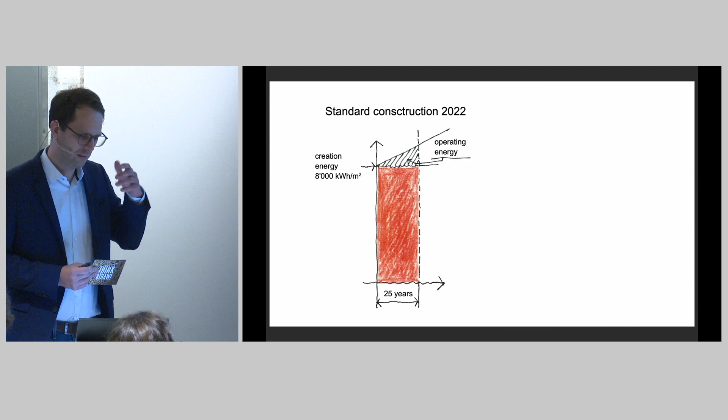So first of all, why did we actually start building with straw? This is a simple statistic that tries to show what the building standard is like nowadays, and what the important points of it are. First of all, we have the creation energy for the building itself, which depends on what materials you use.

For example, if you use concrete and EPS, this is going to be really high. If you use timber and straw, this is going to be really low. That's one factor. The other factor is the operating energy of the building: the more insulation you have, the less energy the building needs, and the more photovoltaic you use, the more energy the building itself can produce.

And the third aspect, which is probably the most important one, is the lifespan of a building. The most ecological buildings are always the buildings that are never torn down, because the moment you tear down a building, you destroy all the energy that was put not only into its construction, but also the energy the building needed itself over all that time.

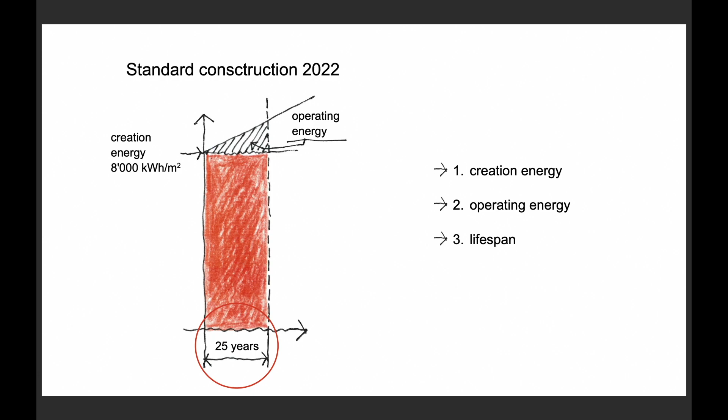So our goal, our vision, is to reduce the creation energy as much as possible by using alternative materials that don't use a lot of gray energy. We try to build buildings that produce more energy than they use.

In this statistic you can see that after 25 years, this is always our goal: the creation energy the building needed is built down, and after 25 years this building is net zero CO2. So after these 25 years, the CO2 level just goes down and not up anymore. The most important part for us is also the 25 years.

We want to build houses and constructions that are not torn down after 50 or 100 or 200 years. We try to build buildings that last a long time, and this is only possible with an architecture that is culturally based, culturally rooted, and that gives a lot of possibilities to reuse the building itself.

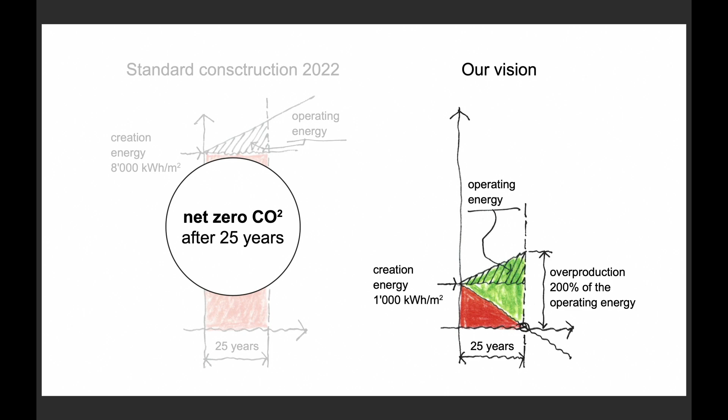Only if the buildings seem usable for the inhabitants will they not be torn down. Otherwise, they will be torn down. This is the most important part, because it's the architectural element within the sustainable idea. It's not just about using ecological materials—if the architecture is bad, the building is going to be torn down after 20 years or whatever.

So why did we start building with straw? We compared all the materials we could use from the point of view of gray energy, and this is just a comparison.

For example, for 1 cubic meter of EPS isolation - do you say EPS in English? Yes, okay - you need around 900 kilowatt hours to produce this 1 cubic meter of isolation.

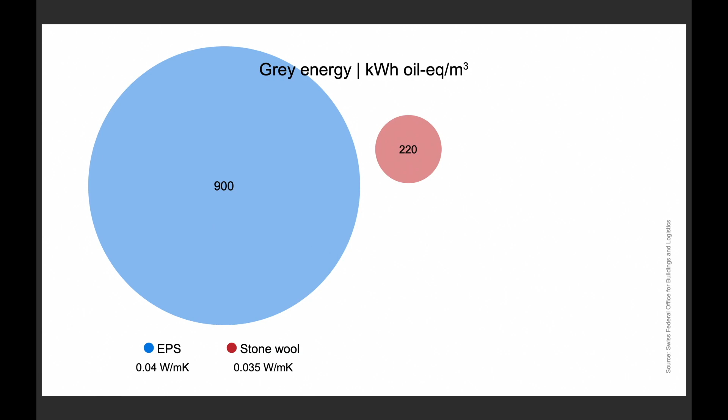For stone wool, you need around 220. For glass wool, you need around 90, and for cellulose fiber, around 63, and for straw in general, about 20 kilowatt hours per cubic meter.

And it's not only the gray energy that it takes, but it's also the CO2 that is inside the straw, that is kept into the straw, that is also an important factor compared to the other materials.

And you also see the heat transition coefficient from all these different types of isolation is similar, but straw is really close to the other industrially produced materials.

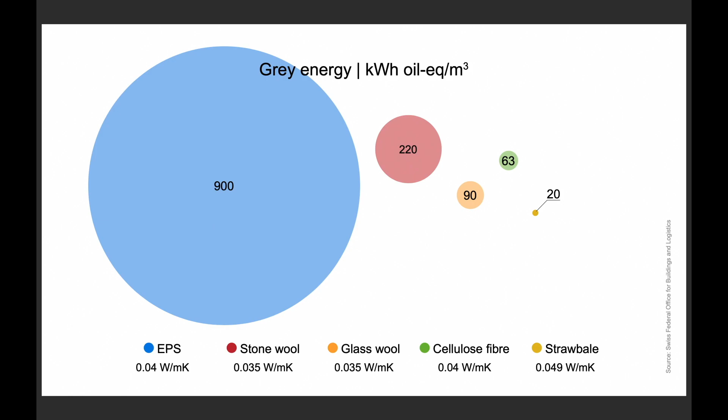And this material, like Mr. Gunnarsson said before, it's just on the field. You can take it from the field. It's nothing that is processed more than the thing that comes from the field.

And we heard before about quality management. For example, straw isn't a product that you're going to receive from a company that is specifically working with construction.

The construction company or the contractor is going to say that he doesn't have straw, or he doesn't know where to get it. We also had a lot of these discussions in Switzerland.

But the straw itself, every farmer knows where to get his straw, and the contractor just doesn't know that there is a whole agricultural logistics for this product that they don't know of.

And this agricultural logistics is really, really good, because any farmer can call today to the contractor, and he's going to get his straw tomorrow. But the problem is these are two different logistics.

One is the agricultural logistics, and the other one is the construction logistics. And also with the quality management, a farmer knows how a good straw bale should look like, and no one is going to give the farmer a guarantee.

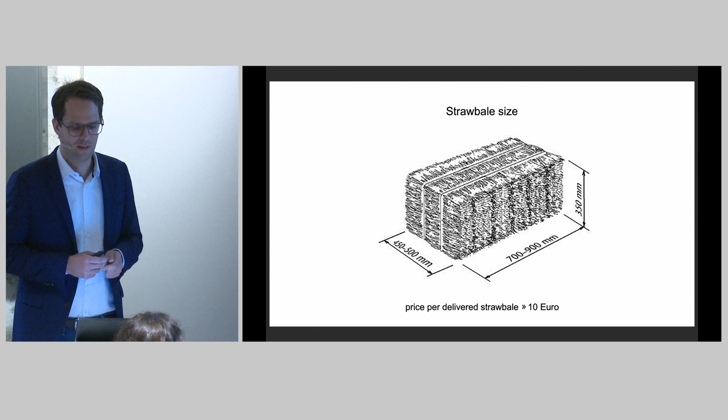But it's a bit problematic also. Like I said, in Switzerland, we often have to explain to contractors that this is not a bad deal for them too, because it's not a lot of work to do it, but they need a bit of persuasion to do it.

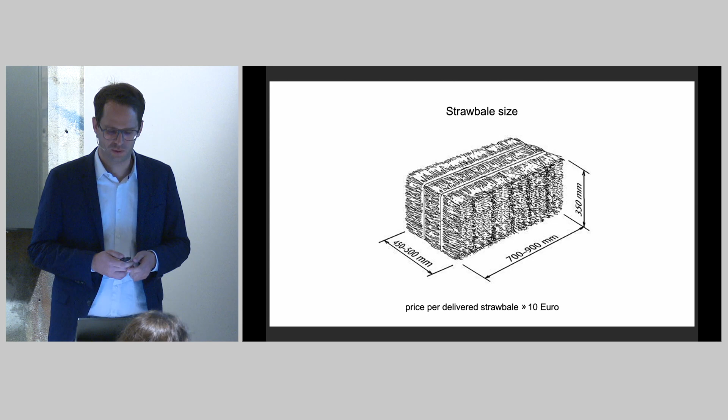There are mainly three different types of constructions when you're building with straw. One is the frame construction, where you use the straw to fill the frame.

And there is the second type, where you build up the straw bales kind of like bricks in front of, for example, a timber construction, or also another kind of construction.

And we mostly use the second type for renovations, for old houses. And then there is the third type, which is the load-bearing construction, where the straw bale itself is the brick.

So you don't need any structural parts beside the straw itself. And this is kind of the most advanced way to build with straw, because you reduce the gray energy from the whole wood construction too.

And this is not a new invention. The first load-bearing houses were built at the end of the 19th century in the United States, because the farmers there realized that if they take the straw bales and build houses of it, it keeps you warm in winter and cold in summer.

And also in Europe, the oldest frame construction with straw bales is in Montargis, France, and it's now around 100 years old, and you can still go and take a look at it. So it's not a new invention, it was always there.

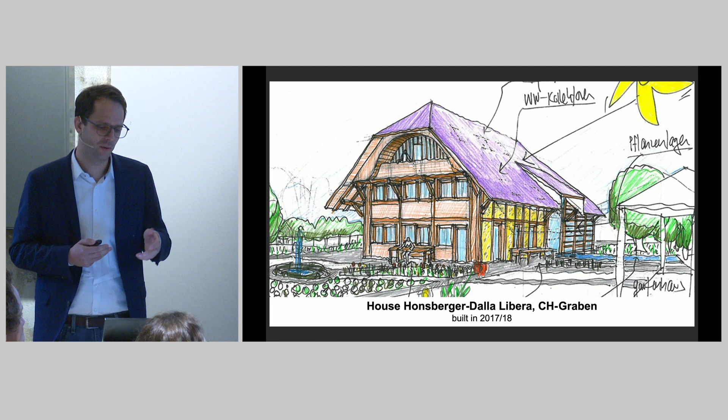I'm going to show you different projects where we tried to realize our vision, and this is the first one. It's a single house, but I show you this because we could realize so many parts of our idea there. This is in the Swiss canton of Bern, a single house in a small village, where the State Office of the Preservation of Monuments told us that this building has to look like the other buildings all around, and these houses in Bern typically have really big roofs. But the client wanted a really open space, a really modern architecture. So that was at the beginning kind of a problem to get these two ideas together.

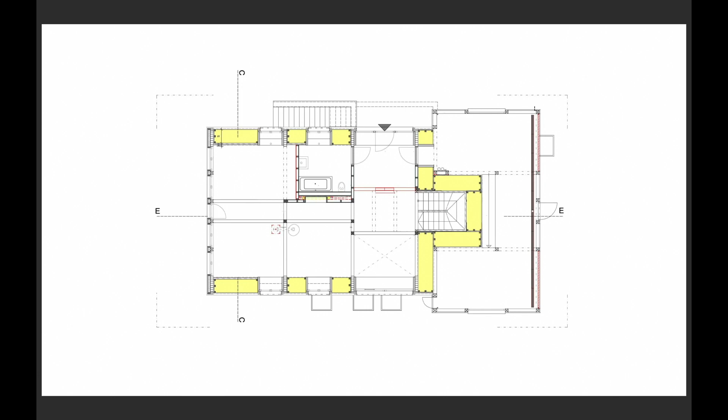But we started by doing a simple ground plan. On one side the garage, and on the left side we had a wooden frame construction that was stiff in itself. So we started with this wooden construction, and then we created elements filled with straw into this wooden construction.

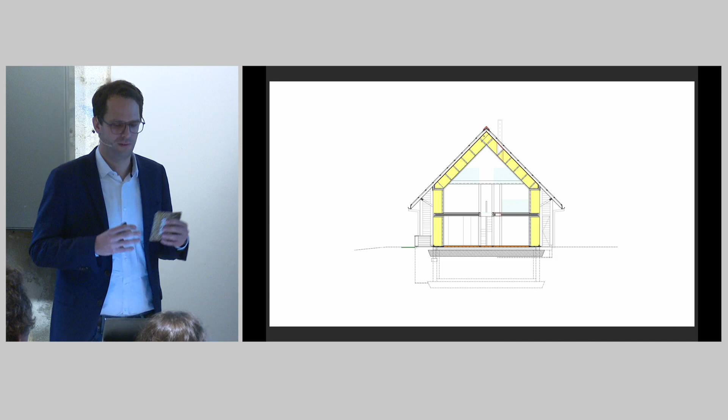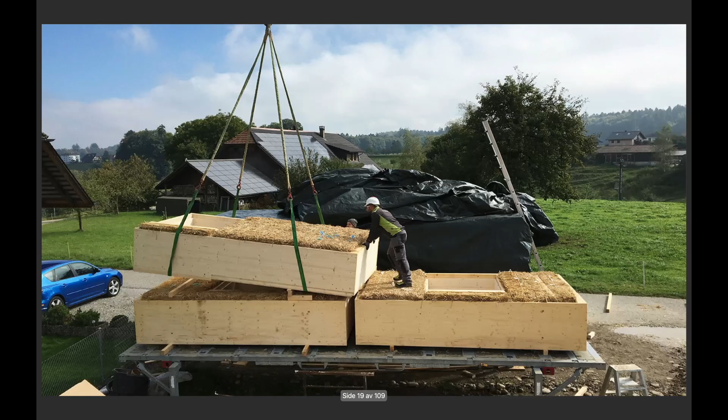Here we worked with bigger straw bales, so the wall is 80 centimeters thick. But this way you don't need a lot of rest energy, because all the energy that you produce in the house itself is enough to keep the house warm. Here you see this timber frame that we started with the construction, and into this timber frame we put these elements of straw. You see the thickness of them.

Just to explain how it works in Switzerland: we as an architecture office write down all the work that is necessary to do, and then we send it to different companies to give us a price. For example, they often don't know the price for straw, and then they are unsure about this, but we always get different prices. The prices are really different often, but at the end we always find a contractor that does it for a reasonable price.

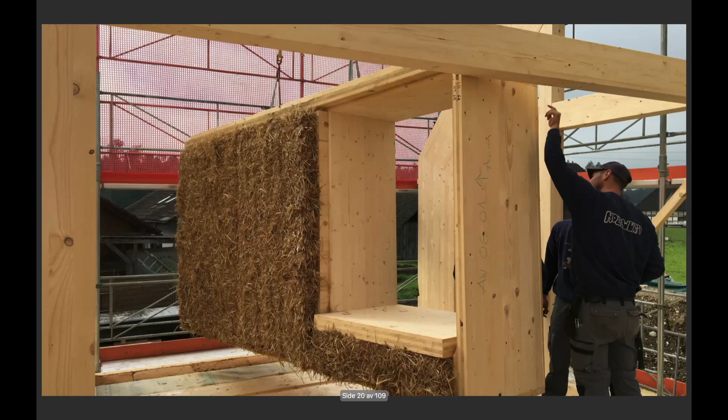So this is one of these straw elements. In this case, because the wooden construction itself was stiff, we could leave the straw open, from the inside and the outside. On the inside we worked with clay, and you can use the straw itself as a plaster base - we put the clay on it. On the outside we worked with lime, because lime is really typical, especially in the Alpine region. Lime is water resistant in comparison to clay, which is not water resistant. So we often work with clay inside, lime outside, and in the middle the straw for the insulation.

So you get all the perfect aspects of clay, which is a really good product. We have the straw, which has really good aspects of insulation, but also the possibility to use it as a brick itself. And on the outside you have the lime, which is water resistant but also open, so the whole wall can breathe. This is also good for the living inside - it's really healthy living because you don't live in a neoprene, but the building can breathe.

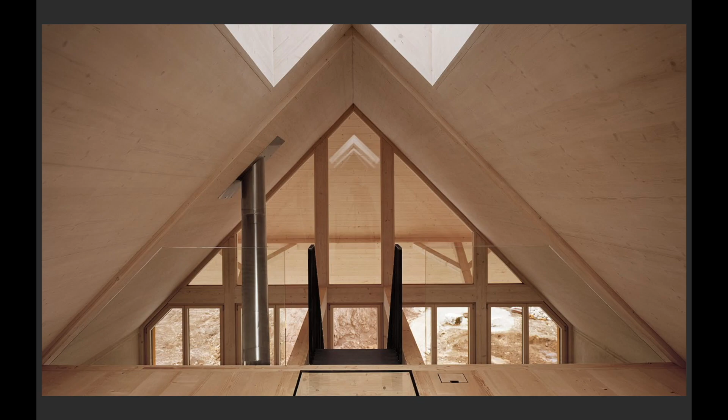Then you can see this huge roof that we had to build. We took this as a chance, and we covered the whole roof with photovoltaic and solar thermal. But the problem was that with this huge roof, the clients still wanted a really open space and a light-filled house. So we created light shafts on top that go through the whole building. You see at the top one of these light shafts, and for the ceiling we worked with a lot of glass so that the light comes through the whole building.

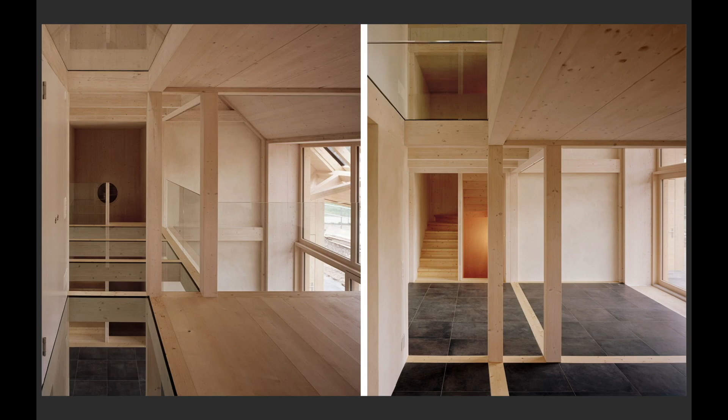And so the building is really light and modern, even though it has this huge roof. The building itself produces around 6 times more energy than it uses. So the CO2 emission from the construction is offset after 25 to 30 years.

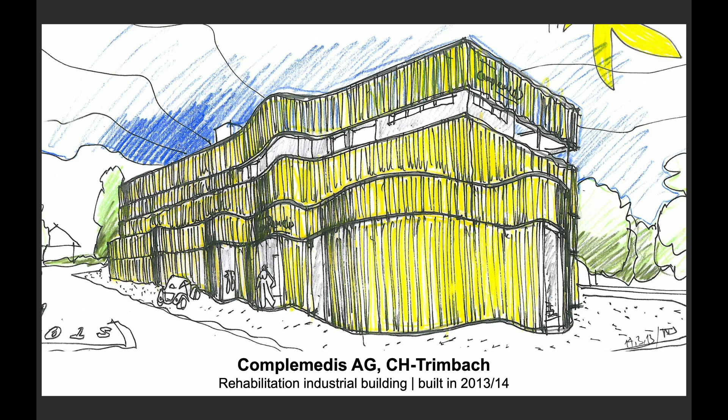So we decided to work with the sleeping bag idea from before again. This time we have a winter coat and a summer coat. The winter coat is made with a straw construction - wooden elements filled with straw. The summer coat is the bamboo cladding you saw, which prevents overheating during summertime, and it's also a product that's really close to the company itself.

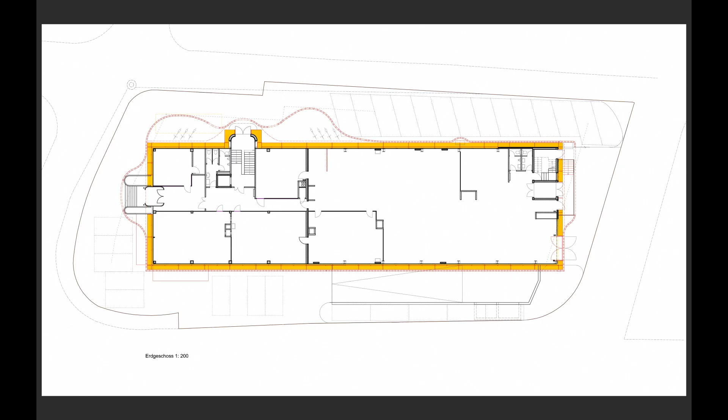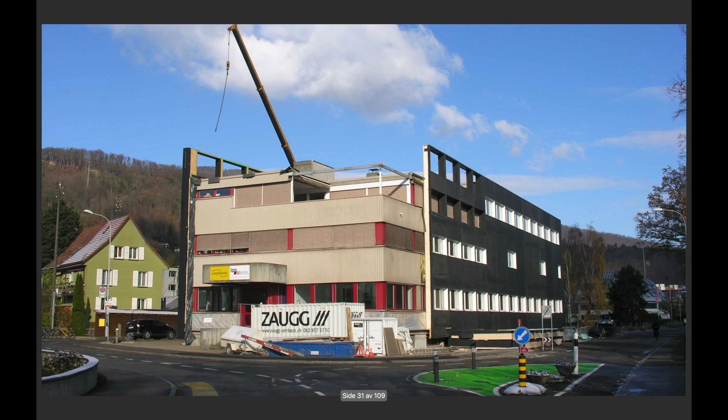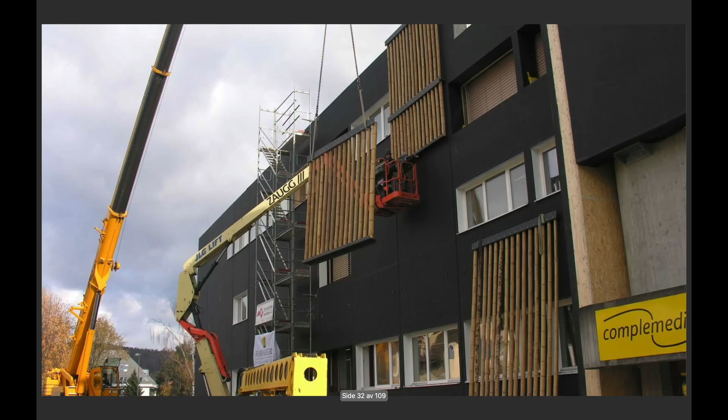Here, this is a picture during construction time. You see the winter part, the insulation for the winter time. And here you see the summer coat being put onto the building.

And this way we could accomplish all the goals the company told us. They could use the building during the whole construction time - this wouldn't have been possible with other construction methods. So for them it wasn't even a question of whether this was more expensive, because we could ensure they could keep working during construction. This was their main argument, not the ecological materials.

And at the beginning, the bamboo looked yellow. Nowadays it's silverish, and it actually looks even nicer than in this picture.

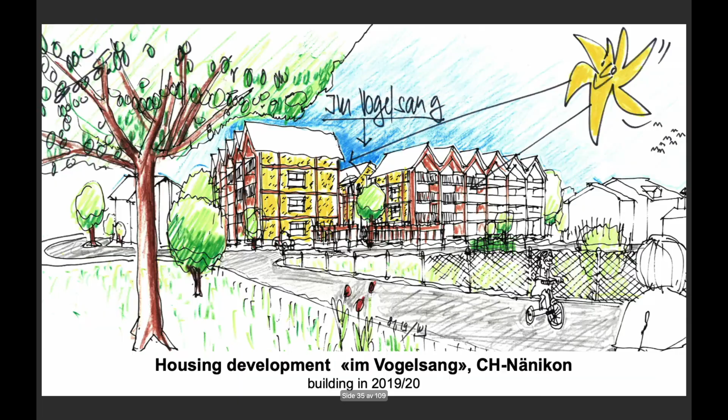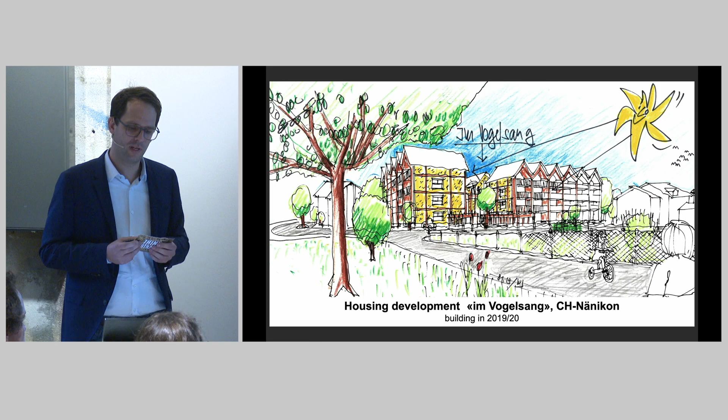Okay, then this is the next project. This was an investor's project in Nänikon, close to Zurich. The client came to us and said they want to build ecological, but they also want a return on capital - and the return on capital should be like the market return on capital. So we had to find ways to build ecological on one side, while also guaranteeing the return on capital on the other.

So we made different decisions for that. One of the main points was: if you build ecological, the architecture has to be persuasive enough that people are willing to pay more for it, because people are often not willing to pay more just because there's clay instead of something else. So we had to create a good building with more qualities than a normal building.

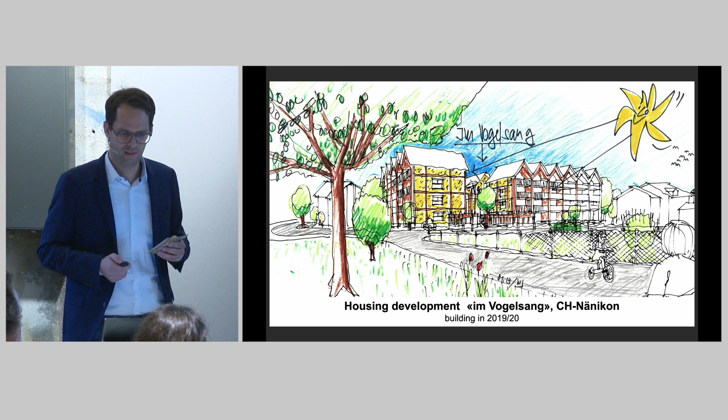And here we tried to do that. This is the situation of the building, and we put these 3 buildings on the outside of the building plot, creating an inner courtyard with a lot of different public spaces.

You start from a really public space, and then every inhabitant goes through a balcony access to his flat, and it gets more and more private until you're at your own front door, and then you have your own entrance to the house.

There were two ideas behind this. On one side, to create a village-in-a-village kind of way, so every inhabitant has their own house, their own door, so they feel this is really their home. It's also interesting - people nowadays really look after their balcony, they take care of it. On the other side, we wanted to reduce the expensive part, which is always the heated square meters inside the building.

So we tried to reduce the built, heated square meters.

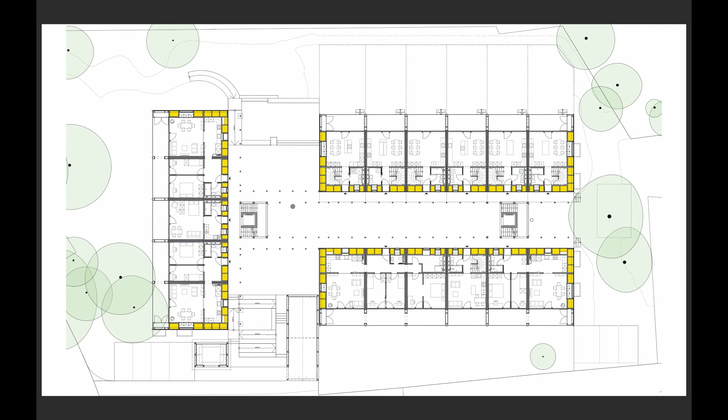This was the reason also for the balcony access, because this way we could do cheap access square meters to get to the apartment. And we tried to reduce and create as few square meters of warm living space as possible to reduce the whole costs.

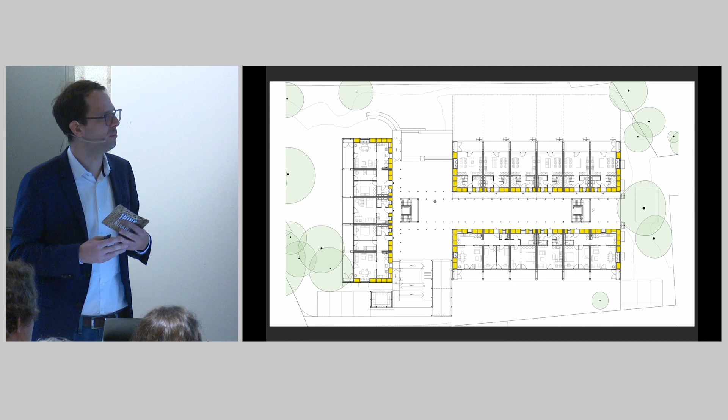On the other hand, we decided with this structure to be very flexible. The marketing company said how many apartments they wanted, what size they should have, and they always changed their minds. So we had to develop a ground floor plan that is flexible, one you could change even at the last moment.

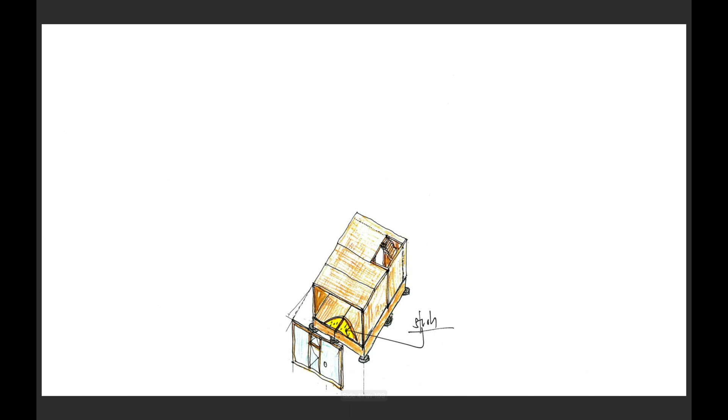So also to reduce the cost, again, we decided to prefabricate as much as possible. We not only created wall elements, but whole room elements that were prefabricated. This way you had a simple way to build the house. It's kind of like Lego, and it helped us that we could work during winter time. On one hand, and on the other hand, because the production was serial, the prices went down.

And at the top, we could use the roof to put photovoltaic panels on them.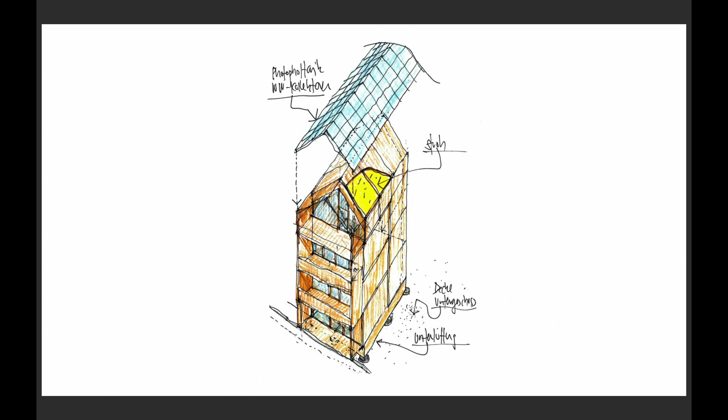On these pictures, the houses were sold, and they were sold really fast. After 3 weeks they were all sold, and this was really good for us because we had the idea, but we weren't sure how the market was going to see this, and people were really looking for something like this.

People were also willing, like if you go to the supermarket and buy a biological apple, you are willing to pay a bit more for the biological apple. It's kind of the same idea, just with living.

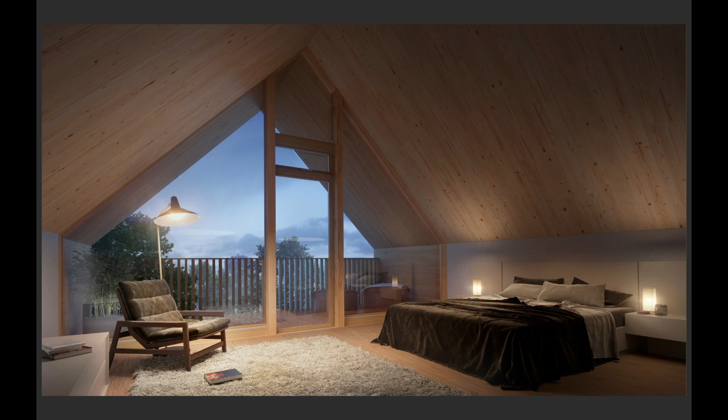We really had to persuade the marketing company that this is possible, because the marketing company always said this is not going to work because people are not willing to pay more for this.

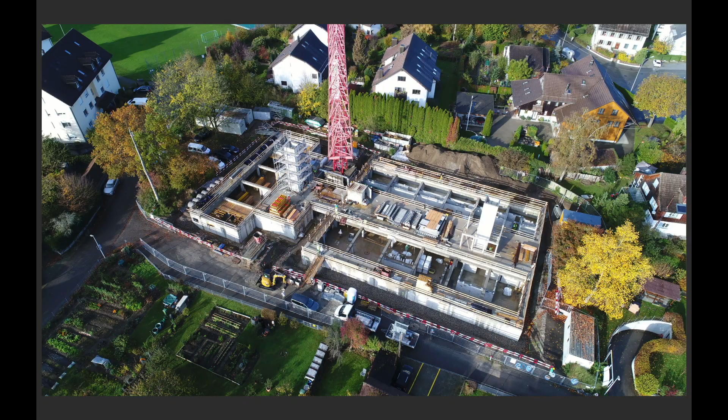So this was then during the construction time. We started, or the contractor started with the concrete works, and at the same moment we were working on the concrete works, the carpentry started working on the elements.

It's also possible to just do the 35 centimeters. If you just take the 35, you also reduce the creation energy, but the consumption cost not so much. But from an investor's point of view, probably 35 centimeters is more economical than working with 70 centimeters.

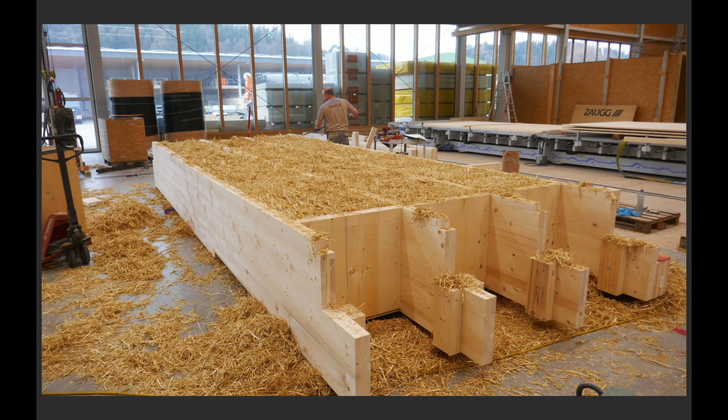This is one of the ground elements. For example, the contractor—we wrote to around 25 of the big carpentries in Switzerland. We sent the offer that they should bid on, and from these 25 companies, just 5 gave us an offer. Of these 5, two were really close to each other, the other 3 were really far away.

So we started working with this company. They got their straw from France, not from Switzerland, because Switzerland's agriculture is really focused on cows and not so much on producing grain. So it's cheap—Swiss farmers get their straw from Germany and from France.

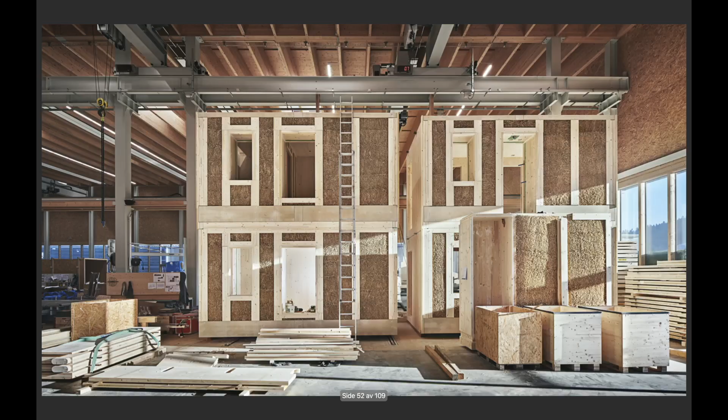And then here you see these whole room elements that we constructed. The idea was that this serial production helped us that the price went down.

Then we took these room elements to another factory that we could rent out just for this space. In this factory we put up all these rooms, and then we sent the other contractors there to do their work. During the same time, the concrete work was still going on.

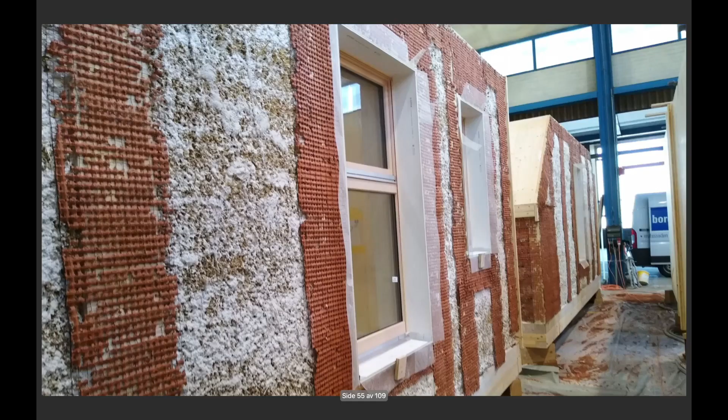And here you see the plastering. You can use the straw bale as a base itself, so we did this.

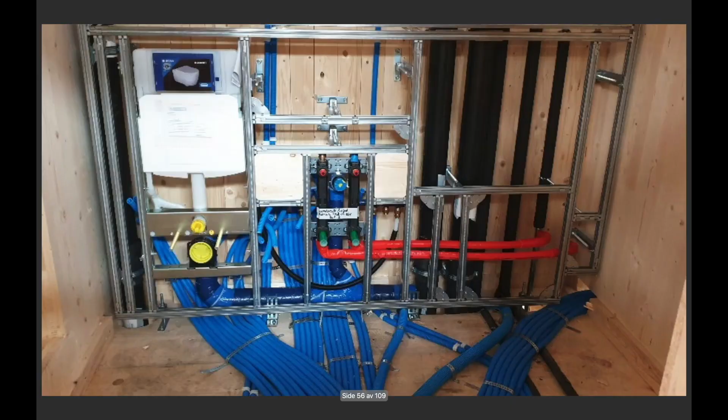And we also put inside all the electrician installations and all the plumbing, the heating, etc. It was all done in this factory.

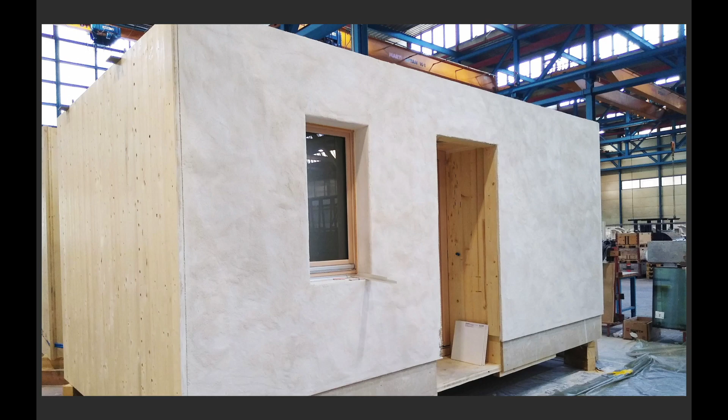We also put the underlay in these rooms so that it's dry when it comes to the construction site. That's the way one of these rooms looked. The windows were already in, the doors were in, and inside a lot of the stairs were done, etc.

Then we came to the construction site, and it was really like Lego, putting this whole thing together. The main goal was to reduce the construction time, and this way we could reduce it for over half a year. This was also an argument for the investor, that they get the return on capital earlier than with another alternative way to do it.

On one side, we got the public space, which we tried to close, with as few windows as possible. On the other side, we open it up completely with light, because this is more private space, and people couldn't look inside.

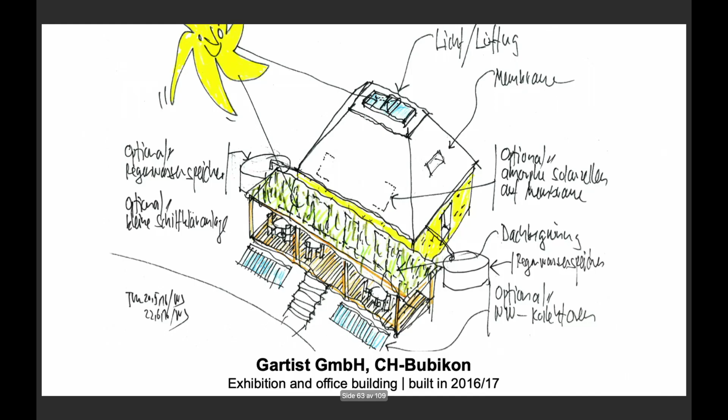And then the last project I'm going to show you. I think I'm a bit late, but this is kind of a next step project. We tried to see how far we can go with straw.

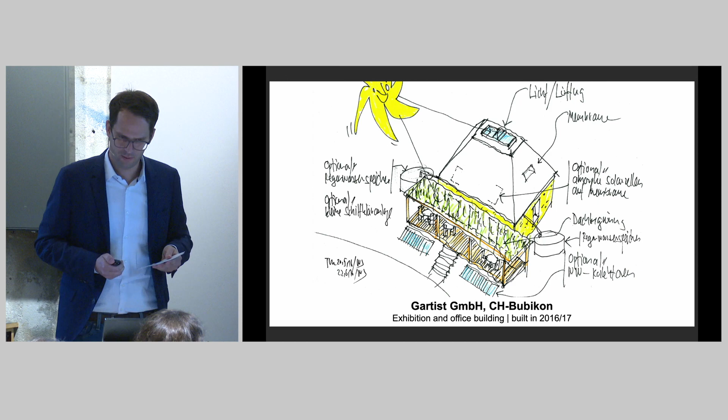We took this idea and thought it should be possible with straw bale too, because straw is kind of a brick, similar to stone. We persuaded this company, which is a gardening company, to have their new headquarters built this way, and this is a load-bearing construction. Not the other part, which was kind of a frame construction filled with straw.

This is now load-bearing, so it's important if you work load-bearing that the floor plan is symmetrical. This is really important, otherwise you have the weights coming down differently, and then you get other problems.

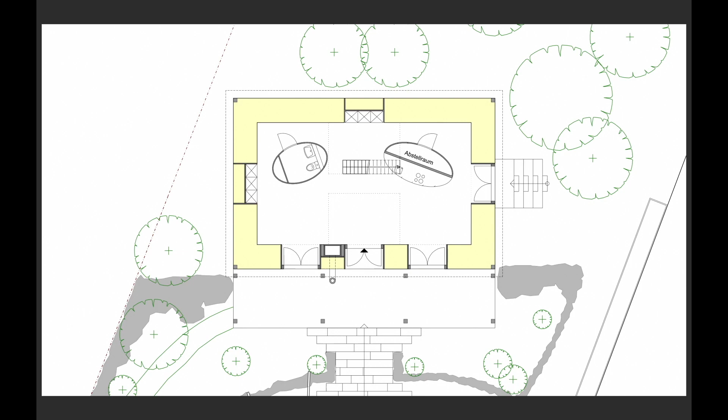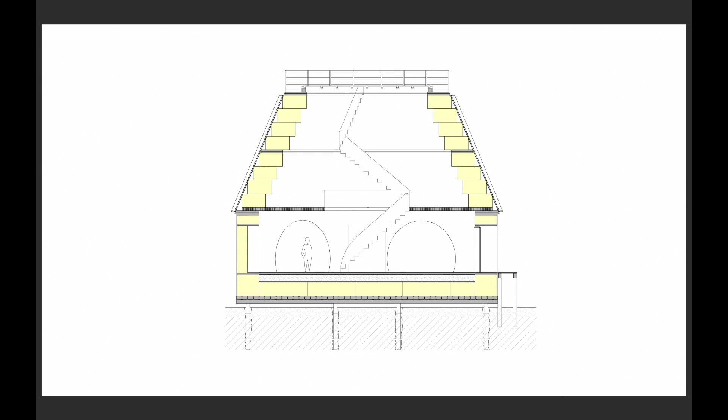We started by putting columns into the earth. The idea was also not to damage the ground.

Then we start with these window frames. These window frames are done. If you put a window on, you have to fix it somewhere, and this is the reason we did these timber frames. And around these timber frames, we used the straw bales like bricks.

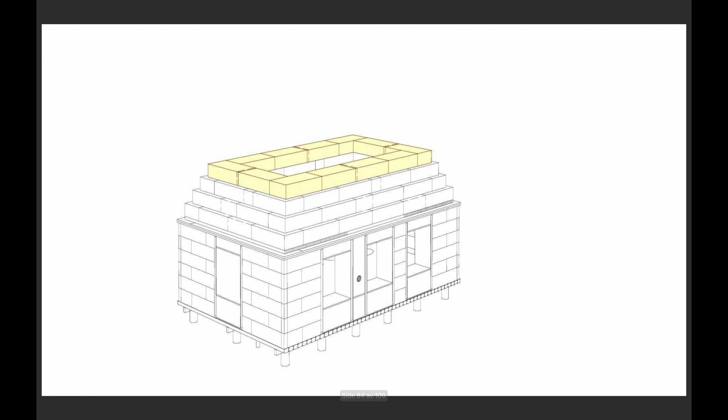And then it went on to the first floor, and then every straw bale was around 20 to 25 centimeters more inside. And at the top we put a huge window so that the light comes from the top.

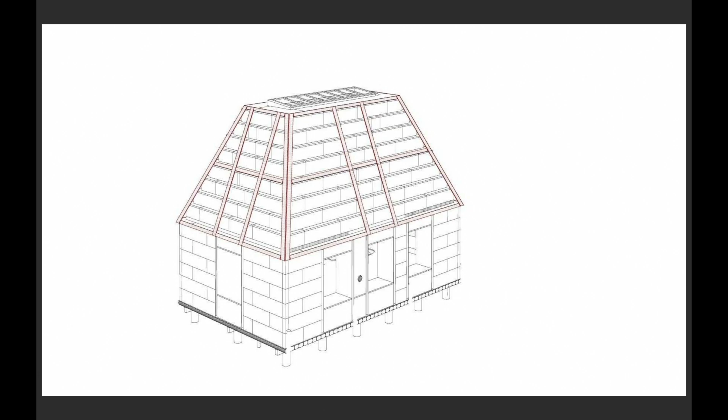On the outside we did clay plastering beneath the roof, just to be sure for the Brandschutz, the fire safety, and we put some corrugated sheet iron on top of it.

So at the beginning you got some air between the two constructions, and then as soon as you put the weight of the roof on top of it, the straw bales are pressed even more until the floor comes down, and you can fix it. Then it doesn't move anymore, the straw is really compressed, and you can't get it out of place anymore.

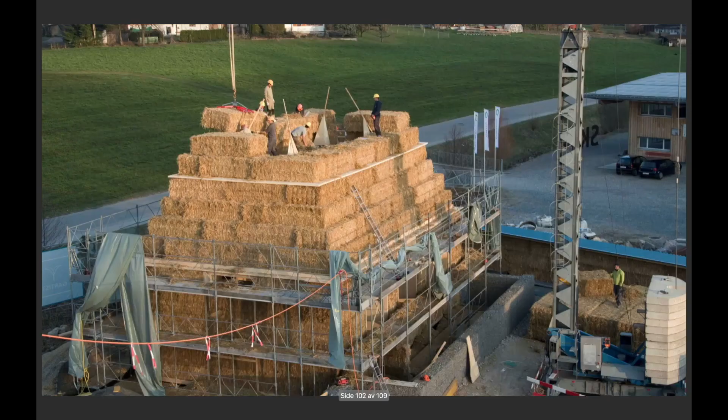Here we worked also with the big straw bales, not the small ones you saw before. The problem with the big straw bales is they're so heavy you always need a crane to move them. The small ones are around 20 kilograms, the big ones around 200 kilograms. So for working with elements, it's much easier to use the small straw bales, but if you work load bearing, it's easier to work with the big ones.

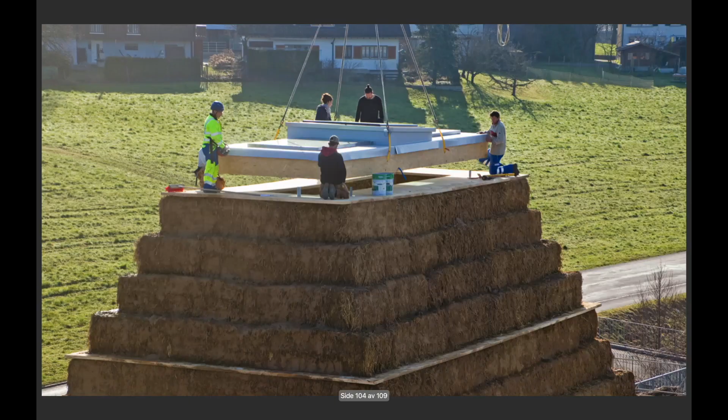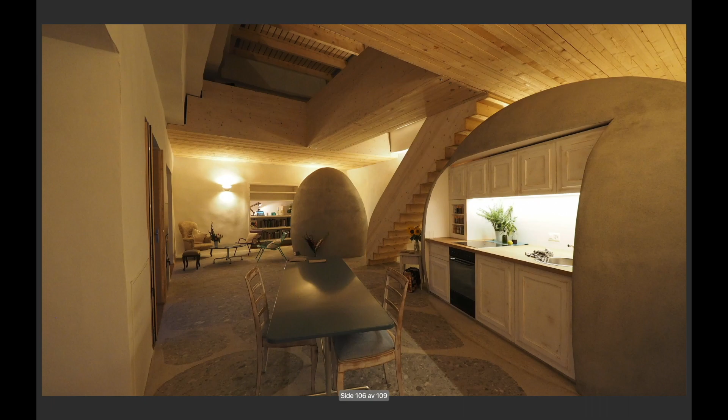This is the inside. We really wanted to show the construction from the inside, so we put lime plastering inside. And now they also rent out this place for weddings or similar events.

And top there are the offices. So we created a stair that you can lift up, so they can rent out this place without people going up to their offices. And there is the toilet and shower inside these egg-shaped structures. This is how it looks now.

I just want to really say to you, this is really no rocket science. It's an easy way to build, nothing complex. I really don't understand contractors who don't want to do this, because the material is cheap, it's an easy way to work, and it's not complicated. And like Sigurd said before, it's there, under our noses, and we don't use it.

The idea is that straw is available everywhere, so wherever we build, we try to get the straw from the place where we do the building. This is really the easiest way to reduce the gray energy part of buildings.

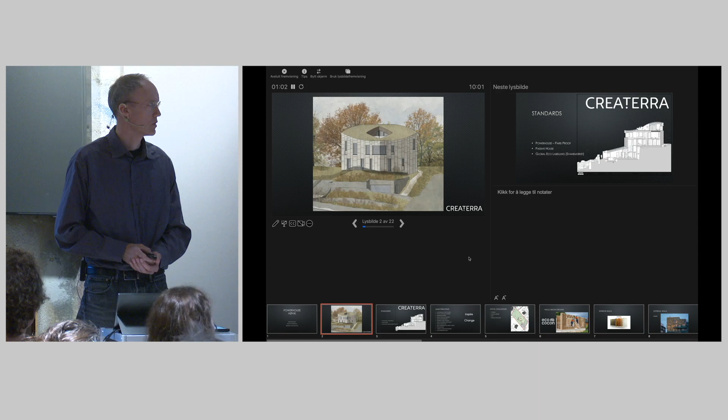We started this process about 5 years ago when we wanted to build a house, and we were rather surprised how little has been done in Norway when it comes to construction and sustainability. So we talked with the Association of Architects, and they helped us through to Asplan Viak, to Skanska, and Snøhetta, which has helped us a lot in this.

We had a house complete, drawn up and applied for last year, which was unfortunately rejected, so we had to move back to start.

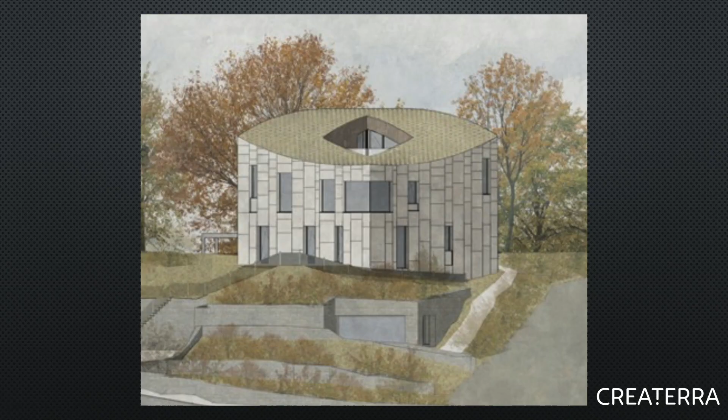The advantage is we learned a lot from this, because the first building we wanted to make was more like a symbol building, a tall one, whereas now, from all the learnings and going back to start again, we wanted to look more at the cubic principle, because that is, in terms of insulation and surface, the most sensible way to do it. We also wanted to have it at high standards.

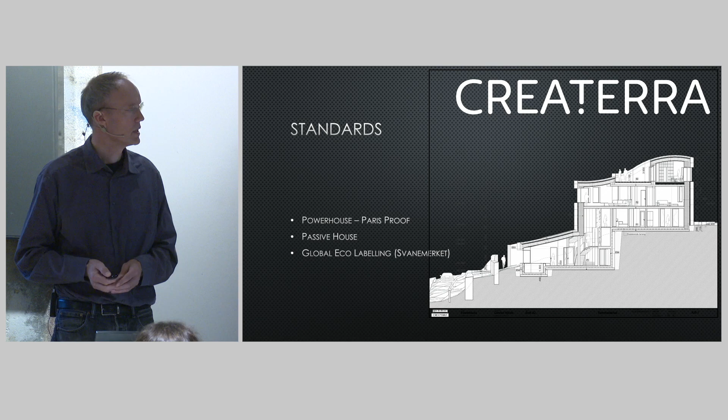It's great with clay and hay, but we wanted to showcase that this is possible for a more upmarket building, and not just a very restrained building. So we've been trying to have 3 standards in mind when constructing this: power house standard, passive house, and eco-labeling. This is the building now in profile from the sides, so you see the top.

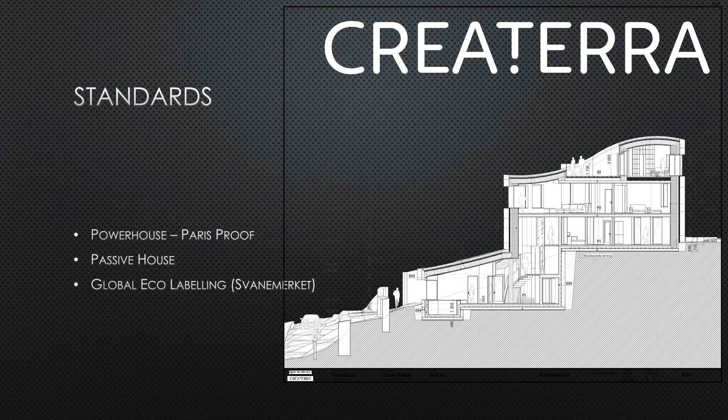This is a sloping property. It's about 11 meters from the road, which is here, up to the surface where the house is. So that poses some challenges. The way we solve this is to put the basement and garage in front, and the building itself in back. We also don't want to move too many masses on the property, but some will have to be shifted.

When we started this, we were looking at CLT, for example. We found that the business was focusing very much on moving materials and not always on solutions. Fortunately, we're working close with Sigurdur, and he suggested the hay solution, which, when we looked at all the climate statistics and emissions, just knocked out everything else in terms of emission, and made a lot of sense.

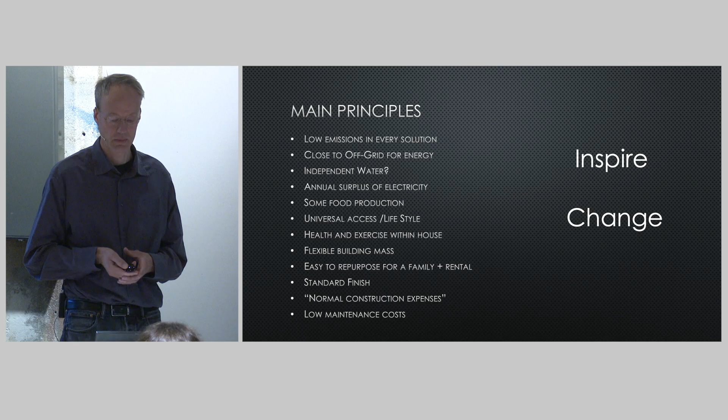We also wanted, to a certain degree, to look for a close to off-grid principle, and have independence also on water. Basically having something which is completely independent would be a cool thing. This was pre-war thinking and these situations, but we think, in an overall perspective, having more independence on each building makes sense for society and resilience.

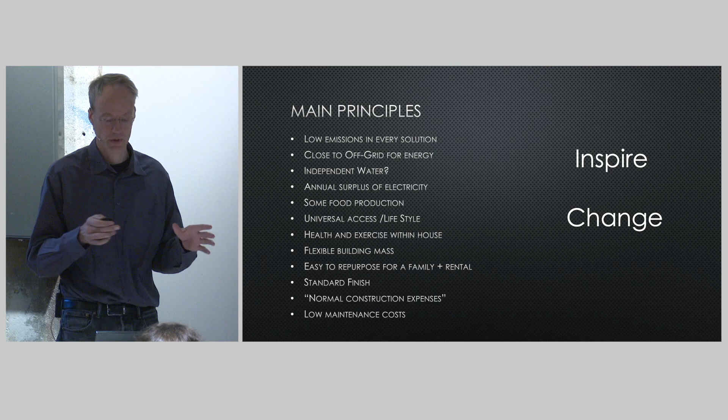We also wanted to have the possibility for someone to live there permanently, without going out of the building, to have exercise, to have work, like a closed ecosystem for that. And we wanted flexibility in the utilization of the building over time. So even though it's cubical, there's one central point of support in the building, but apart from that, all the walls can be changed for future repurposing.

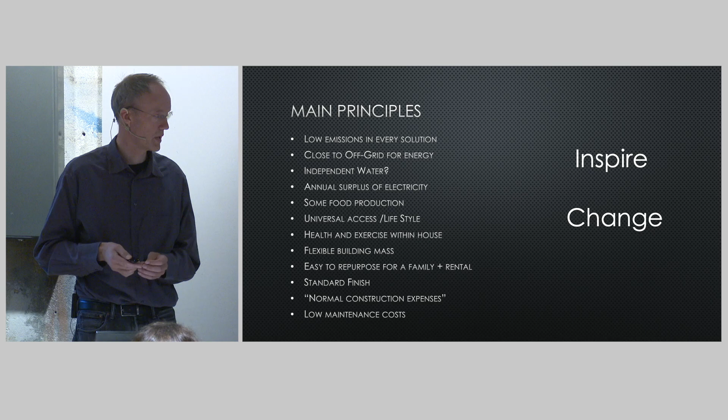We also wanted to address that the expenses for construction should be low by using elements and smart solutions. So we're prepared to pay a lot extra for the planning part, but we hope the construction part won't be too excessive compared to a similar build. It will be a little bit more expensive, but if that part can be a showcase, it shows it's possible to do it within this range.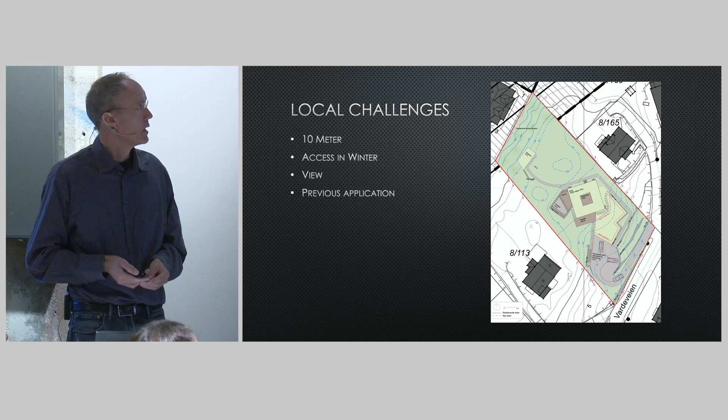The challenge is also that there is a house today, approximately where the current house is. The current house is located here. We're going to use that basement. It's from 1929, not insulated in the walls, so it's already cold now. It was last refurbished in the 60s. It's a challenge to get up to the house in winter — there's a driveway we need to clear of snow, and we're going to get older. We wanted a simple life here, and there's also a nice view from the house, so that's something we wanted to bear in mind.

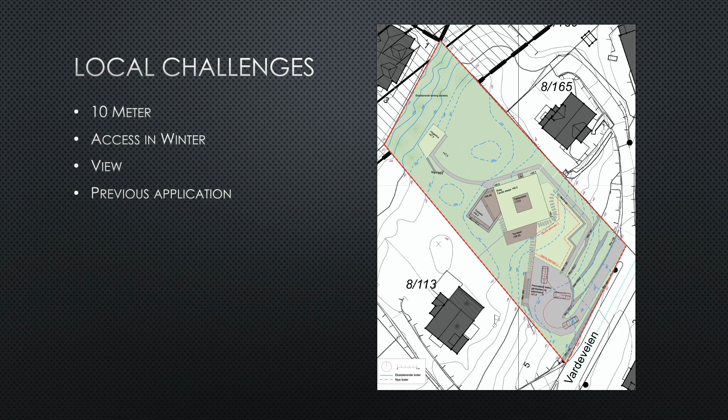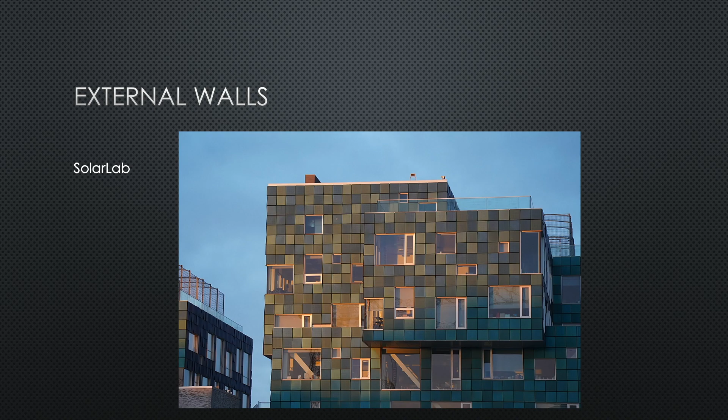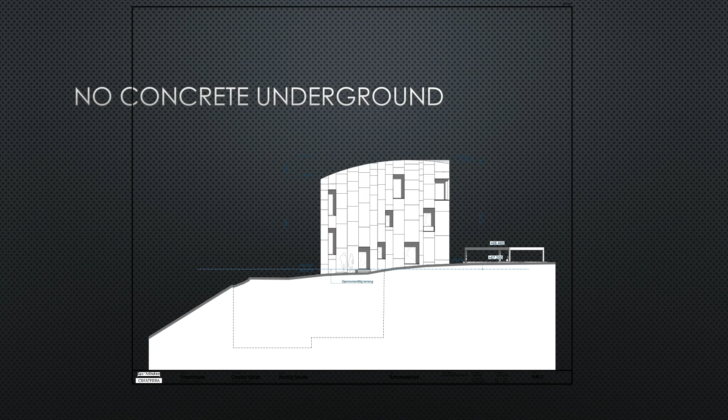The other challenge was the basement part. As you see here, the basement is in the front, but we didn't want to use concrete, and that was one of the things that took us so long — sometimes we hit resistance where we hadn't found solutions we were comfortable with. Now we've come up with a CLT solution underground with a Swiss engineering company, with membranes on the outside and measurements on the moisture level. It gives a bit of restriction on how we use it, but we think it's a cool way to avoid the concrete part. We worked a lot with concrete — we really wanted to use it because there are a lot of advantages, but emission-wise, we didn't solve it too well.

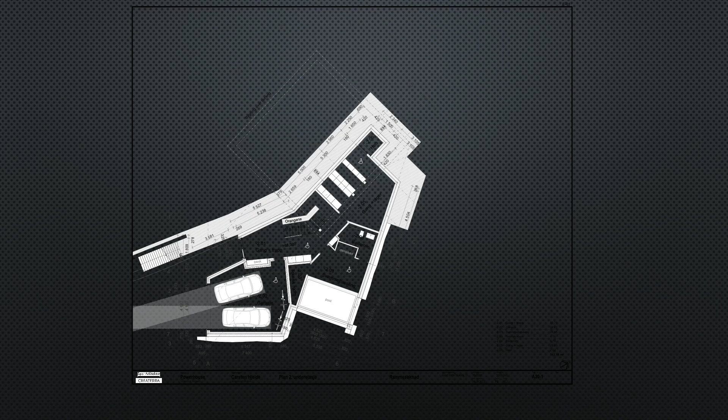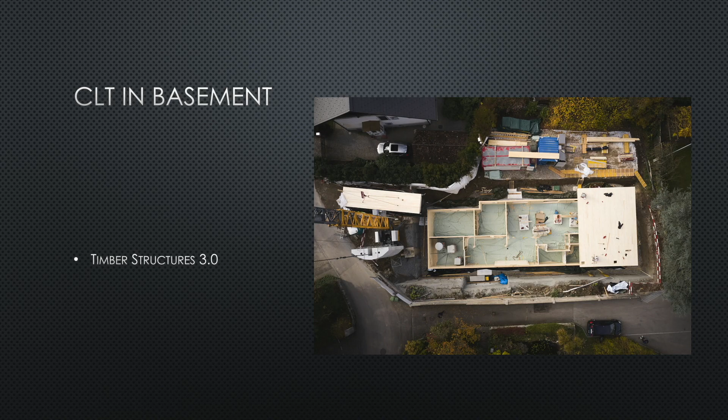So here we see the building from the south. This is the basement where we're driving in with the cars. We have a swimming pool there, which is counter-current, about 4.5 meters long. Then there's an elevator in the back, so we can have access also later in life, and we like to have many staircases because that's good for movement. This is the Swiss construction company for the timber structures, which we'll probably use underneath the building.

We'll probably use glasopor underneath the pool, which we'll be struggling with how to have underground material. Maybe we'll use cellular glass there. We haven't concluded on that, but that might be one material to avoid concrete.

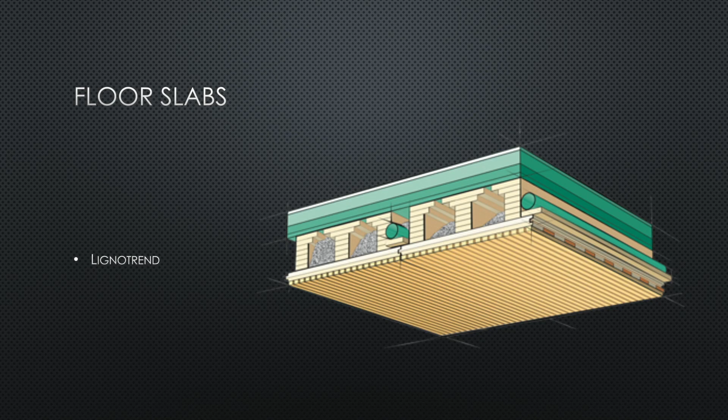For the floor slabs, we're planning to use Lignotrend. That's also because they've been used in combination with the EcoCocon in the past, and it makes sense. Using CLT horizontally doesn't make sense, it's too much material. This uses a lot less material, and it's also better acoustically. It comes in elements, and we fill in with gravel in between to weigh it down. It's an old method, we have it in Norway, the same principle with stubbloft leire. So it's taking a bit from historical experience.

So that's the design part. I'm more focused on climate and zero emission society, but from a design perspective this makes the building look cooler. The driveway has been another challenge, finding a way to do that.

We would like to have it carbon negative. We would like to have it permeable. This particular solution isn't permeable, but it is carbon negative. It's based on lignin, replacing the bitumen as a binding material between the gravel. And it's a Norwegian company, so that's a cool thing.

We would like to have some food production. We originally planned for an 8 square meter room, now it will be part of the staircase, so we'll show it. We have some challenges because we can't put it all the way to the CLT wall underground, but we'll live with that, so it's designed a little differently. The point was to produce some of our own nutrients, and also reuse some of our urine as plant nutrients. That's more of a cool thing since we'll just be a few people living there, but it's a principle of reusing everything on site.

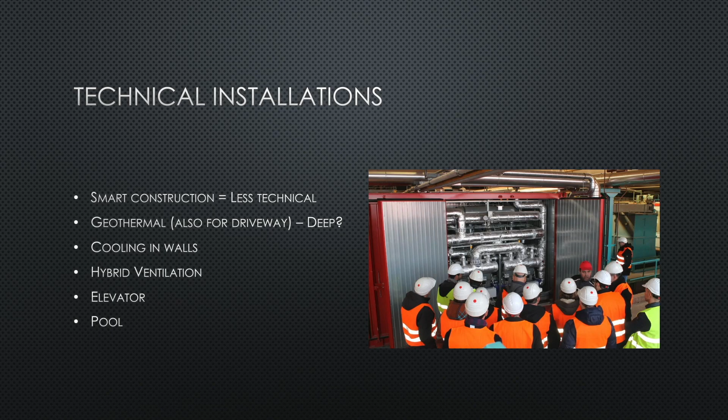We will have geothermal. We calculated we could nearly go away from that. At one point we were looking at deep geothermal, like 1,500 meters, bringing water at 32 to 34 degrees. It's not too expensive, it could be worth it, but we just didn't need all the energy. So if you're making a big building, it makes a lot of sense, but for us we'll manage with less, and we'll actually need the water also for cooling.

We might have 2 wells, we haven't decided. And the cooling will be in the walls too, waterborne in the walls, simply to keep the temperature low during the summer. It's going to be warm. And then we have a garden shed in the back.

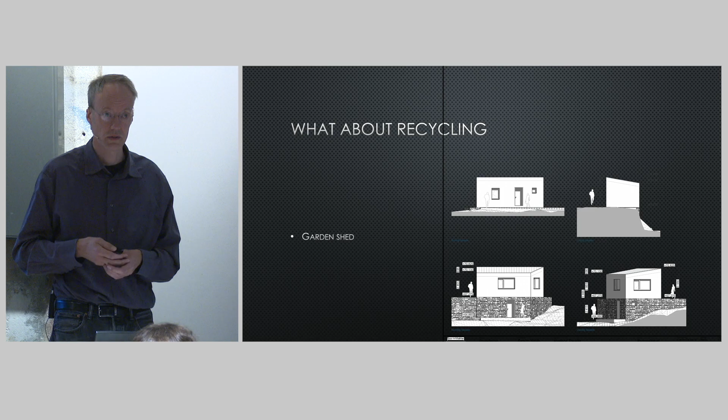We've been looking a lot at recycling materials. It's really challenging for a single house to do that, because you need a planning horizon, you need to block off the materials, keep them in storage, etc. At the end of the day, this is a garden shed of about 20 square meters, which will have an insulated office and a shed, and we'll probably try to reuse most of the materials from our original building.

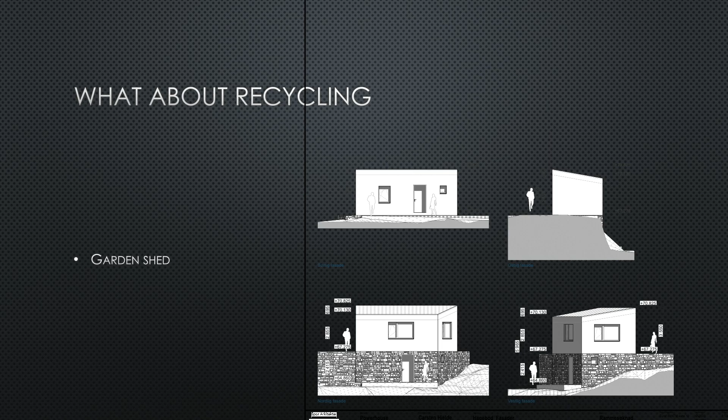And then there was a question from Sigurdur, about how we can bring this to Norway instead of having the materials delivered from the Baltics.

To be very frank, I'm not too positive on Norway and climate. I used to live abroad for many years, and I was very proud of my country. Now I'm getting more and more embarrassed. Politically, we have not decided to reduce emissions. We have kept them flat for the last 30 years, whereas the EU has been reducing them.

I don't see the building industry taking too much responsibility. It's something here and there, there are some good solutions. We have a lot of advantages here, we should have all the optimal solutions for doing it. We have a lot of hay in Norway, but getting that into production needs more demand. It needs the industry and the people paying for construction to actually demand it.

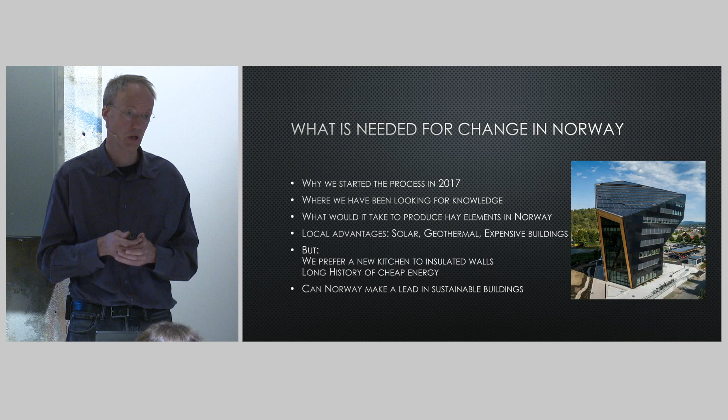I'm not sure, I don't know where we want to go as a country. I think in Norway we have too much focus on having a nice time, koselig. That's the most important part. And if you put that up against doing something new and changing your lifestyle, koselig is always winning. So that's my take on that.

And yeah, it's unfortunate. And a big thanks to the people who have been helping us. We have had altogether about 35 architects, engineers, and specialists involved in this. When we started, we had with Snø, I think we had like 15 people in a one-day seminar on a single house. So it's been a challenge.

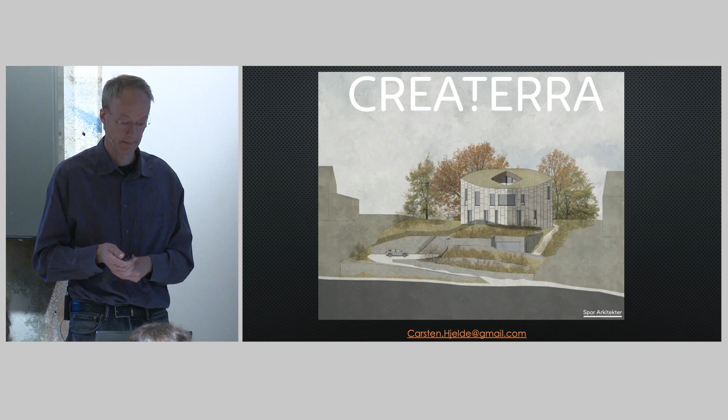We learned a lot, and we feel like now we have come to solutions which we are happy to follow on. Time-wise, we have notified the neighbors, so hopefully we will send the application to the municipality next week or something, and then we'll see and take it from there. If anyone would like to contribute, like building the house, entrepreneurs or something, we are in dialogue with some, but we're open to suggestions and contact as well. So that's all for me. Thank you.

We would like to have now a short discussion with Paul and Carsten on the possibilities and the disappointments of building with hay, and just one sentence to you, Carsten.

You may be embarrassed being a Norwegian, but you cannot imagine what it's like being Icelandic. Paul, would you care to join us? We were thinking... I know that Terje did not like us to sit, he wanted us to stand, but I think we'll try to do the sitting anyway. Is that okay, Terje? Okay.

We got one good question from the net, which we'll put to you, or two actually, Paul. Are there any limitations on what kind of corn you can harvest to use as hay in buildings? No, in principle you can use rye, barley. In German: Hafer, Gerste, Weizen, Roggen, and in Norwegian: havre, bygg, hvete, rug. So this is all possible, but the important thing is that the straw doesn't have any nutrition left inside.